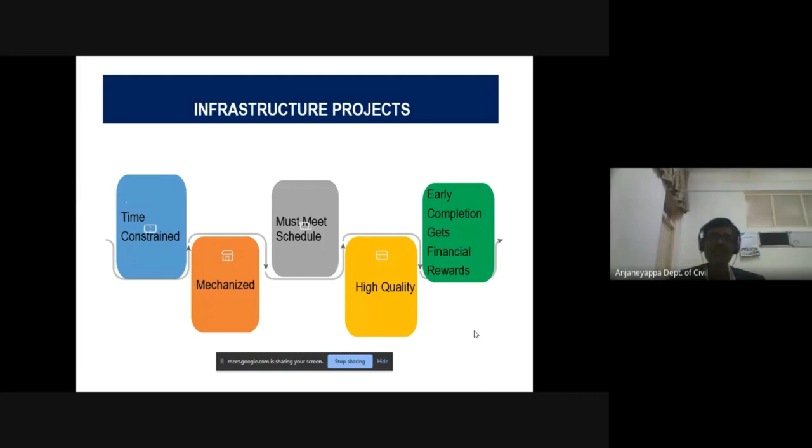Thank you. We cannot think of this high quality without these plants and machineries.

There are some advantages when we talk about these machineries for road projects. Majority of these machineries are versatile, they can be used for different types of activities. For example, the grader can be used for grading, mixing, and even cutting. The equipment delivers higher quality, not just higher quality products but also uniform quality. That's very important, and we can meet the schedule because production and construction will be faster, and because of this faster production we can save time. So, as I said, today's contracts offer financial rewards for early completion.

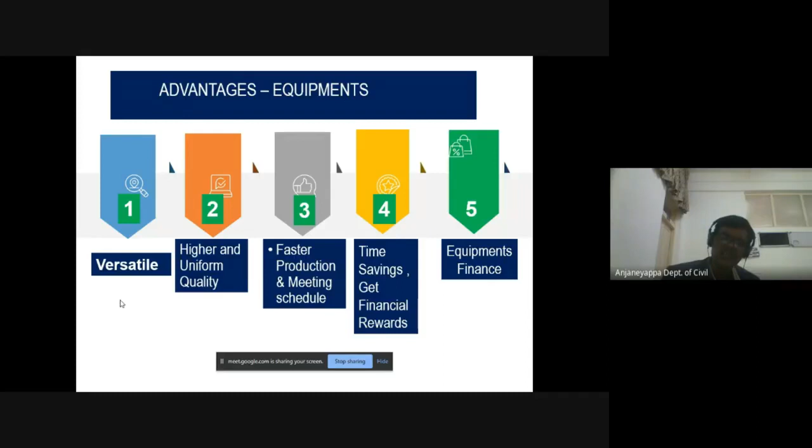When we look at the cost of equipment, as I said, they are very costly, there's no doubt about that. But again, for the owners, there are equipment financing institutions. Getting finance for these equipments is also easy. These are some of the advantages when talking about equipments.

Having said the advantages, there are some limitations also. As usual, these equipments are very costly. The cheapest equipment, our roller, is about 20 lakhs. Underutilization increases the cost of the project, and most of the time, though we induct very costly equipment, the plants for the road project are most of the time underutilized. So this underutilization increases the cost of the project, and operation and maintenance cost is also very high for machineries.

It's about 15%, a thumb rule. So a huge amount, 15% in 15 crores it runs, and in all highway projects, you may be aware that people talk only in 100 crores, 200 crores, 300 crores. Even the smallest project, the PMGSY project, is generally about 4 to 5 crores. So the operation and maintenance cost also will be high.

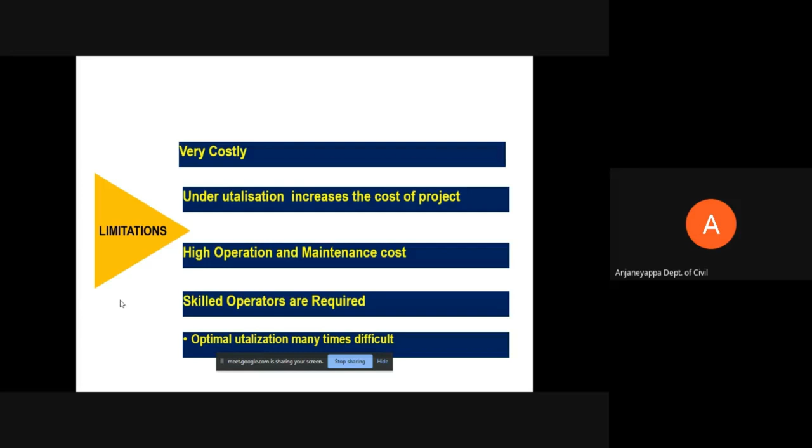More than anything, handling the operation of these plants and machineries requires skilled operators. And to be precise, there's an acute shortage of these skilled operators in the industry, for various reasons. So, some of the limitations.

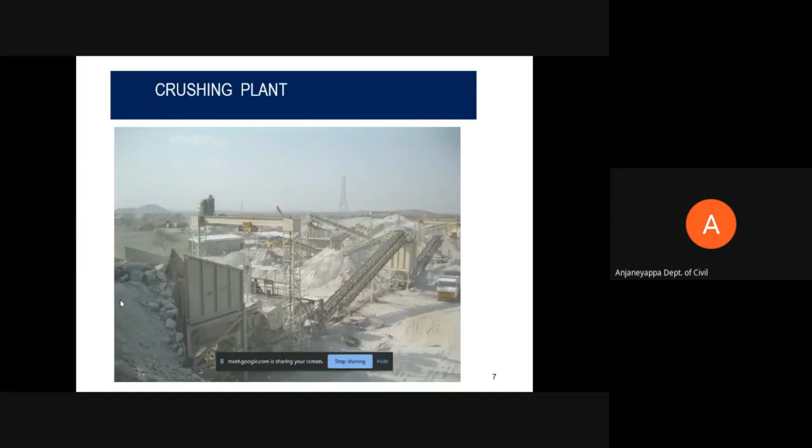Now, let's go to the plants, some of the important plants. This is a view of a crushing plant, an aggregate crushing plant. Go to any road project site, you'll find a crusher, and this is the crushing process from the quarry.

The rock is blasted and then drilled, made into bigger boulders, and these boulders are transported to the crushing plants through tippers. They are fed into primary crushers, and from the primary crusher it gets into the secondary crusher. From the secondary crusher the output will be of construction size, and many times this output is again subjected to the tertiary crusher, maybe to control the shape and to increase the fines. So that's how the crushing plant works.

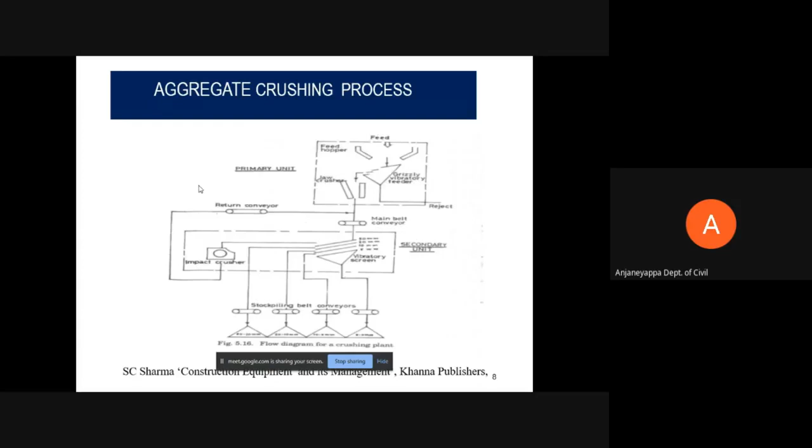So the boulders from the quarry are subjected to two or three stages of crushing, and if you want to classify the crushers, they can be classified based on mobility or based on function. When we classify aggregate crushers based on mobility, they can be classified as mobile crushers or stationary crushers.

What is the advantage of these mobile crushers? The crushing can be done at various locations. Many times it so happens for projects that we may not get the source of rock in one location because a huge quantity is required. So when there is a mobile crusher, this can be moved. Mobility will be easy, it can be moved from one source to another, so that crushing can be continuous and shifting is easy. That's the biggest advantage of these mobile crushers.

But again, there is a limitation. The output of these crushers generally will be less compared to stationary crushers.

So based on function, crushers can be classified as primary crushers. Generally, jaw crushers are used for primary crushing. In primary crushing, the input size is the boulders, generally varying from 600 to 1000 or around 1200 mm. The output size is our soling size, about 90 to 100 mm. So we feed the boulders into the primary crusher, and the output we get is of soling size.

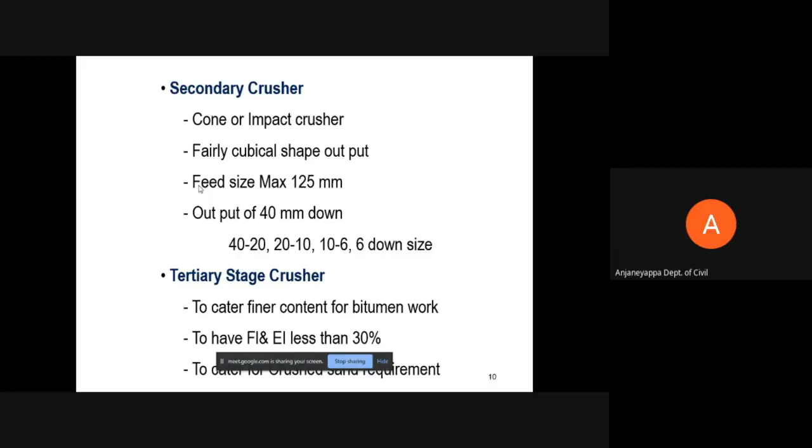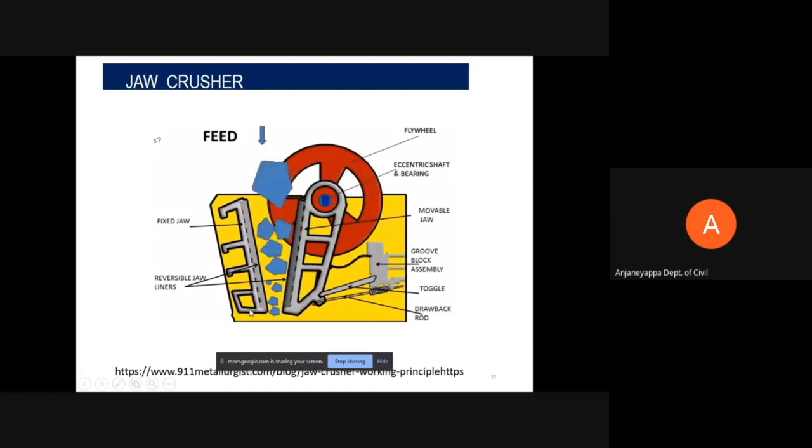This is another view of the jaw crusher. In the jaw crushers, as you have seen in the picture, one is the fixed jaw, the other one is the movable jaw or the swing jaw. These jaws are made up of heavy duty cast steel or manganese chrome steel so that they can sustain the high vibration, wear and tear during compression.

More production is obtained when the feed is of mixed size. Whatever the feed input size, this applies not just here but for other stage crushers also. Whenever the mixed size of aggregates are in the feed, we get more output; uniform size always gives lesser output. Another important requirement for good production is that the feed itself should be uniform in supply. Most of the time this does not happen - sometimes there is more feed, sometimes no feed, sometimes underfeed. So giving uniform feed to the crusher always results in more production.

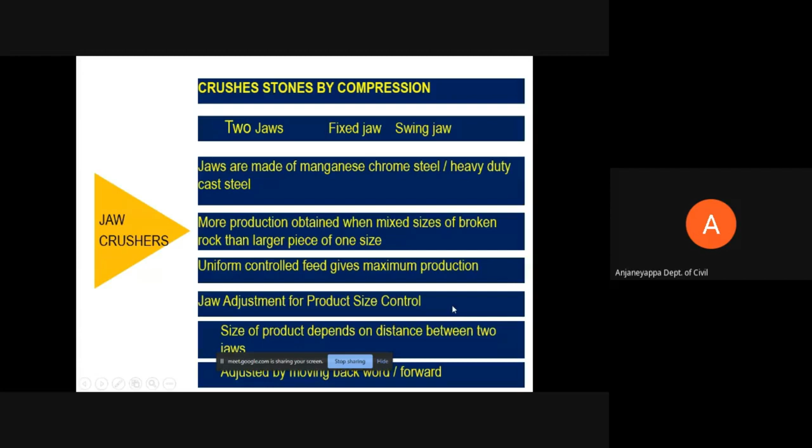We need to adjust the jaws to control the size of output. We can have three combinations of the fixed jaw and the swing jaw. One is the straight jaw, where both the fixed jaw and the swing jaw are straight.

What is the advantage of this combination? The wear and tear will be uniform, and the disadvantage is that the rocks, the output, hangs up here. Because of that, the output may reduce many times. Another disadvantage of having both straight jaws, straight faces, is that it produces more elongated or flaky particles.

The other combination for the jaws in the jaw crusher is one straight, other one kept curved. Since uniform feeding is not always possible, in such cases this combination is advantageous, and the crushing area is increased here, so output will increase.

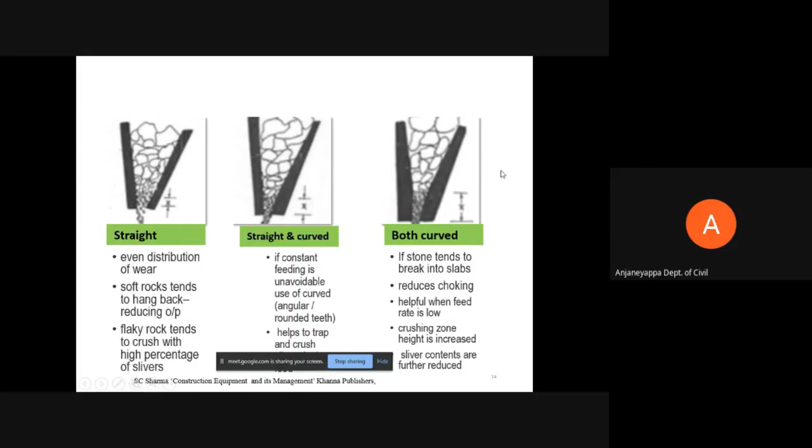The other combination is both jaws kept curved, both fixed and swing jaw. The advantage is it reduces choking, and this combination is helpful when feeding is very less or not uniform. The crushing height is increased here compared to the straight jaws, the crushing area is increased, and the flaky and elongated particles are further reduced if this kind of combination is adopted in the jaw crusher.

This cone crusher can be used to generate construction size output, meaning we get whatever size is required for construction. The gyratory head generates the gyratory motion, and the swinging motion is produced by the eccentric sleeve.

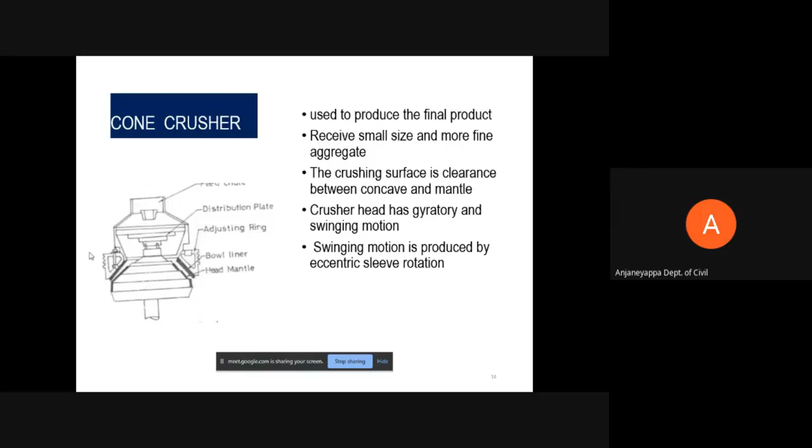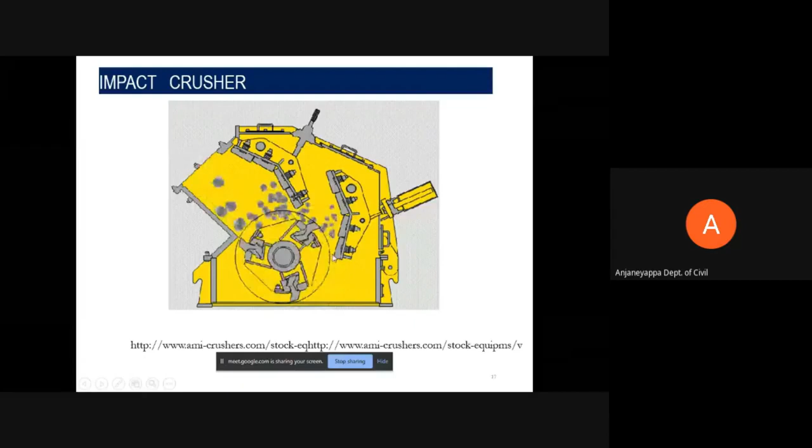The other type of crusher is the impact crusher. This is also used as a secondary or tertiary crusher. This is where the input from the secondary or primary crusher gets in - you can see the hammers - and the gap between the hammers and the rotor dictates the output size.

For the aggregates, both the jaw crusher and the cone crusher use compression to break the aggregates. In the impact crusher, it is the impact which breaks the aggregates. This impact crusher can also be used as a primary crusher, and impact crushers are used when materials are too hard and when a good shape of aggregates is required.

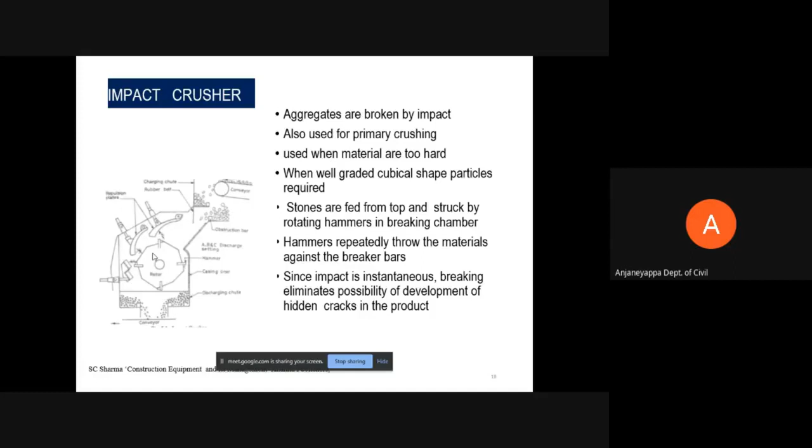The input is fed from the top, and the material is struck by these rotating hammers in these chambers. The hammers repeatedly throw the materials, generating an impact that is instantaneous. This instantaneous breaking eliminates the possibility of hidden cracks in the output, which is desired.

The impact crushers have a high reduction ratio, meaning the reduction ratio is very high, and the biggest advantage is we get a very desired shape and also very high output from the impact crusher. If you look at the reduction ratio of a jaw crusher, it is 4:1 to 9:1 - this reduction ratio is the ratio of feed size to the output size.

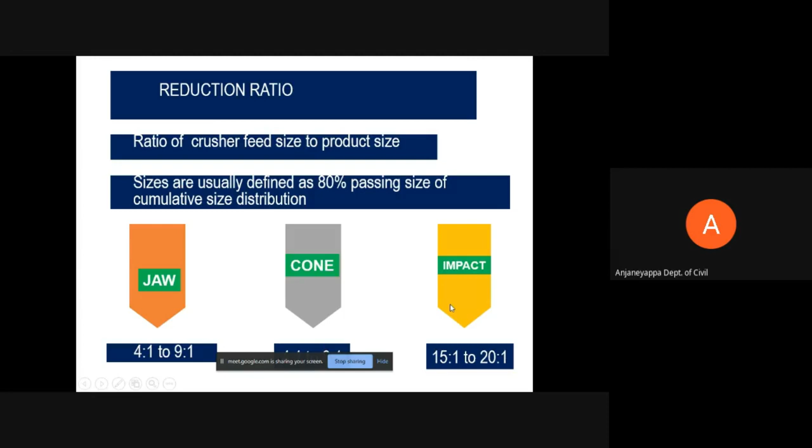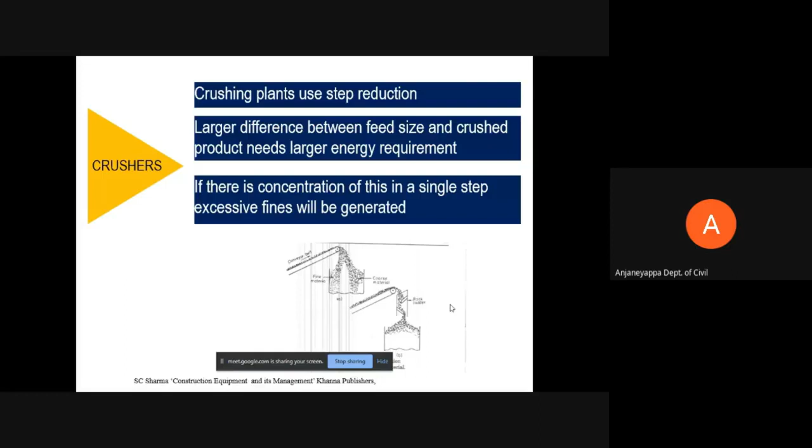Here the reduction ratio is 4:1 to 6:1, and here it is 15 is to 1 to 20 is to 1. So high reduction ratio is expected, and it is very important in crushing to adopt step reduction. A large difference between the input size and output size requires huge energy, and if that difference is very high, excessive fines and excessive sand are also generated. Hence it is always desired to adopt stage crushing.

So the output of the crusher depends on the jaw opening. Lesser the opening size, lesser will be the output. What is the end product size required? Bigger size means more output; lower size requirement means lower output. And the kind of rocks, whether the input is of softer or harder quality, also dictates what the output is.

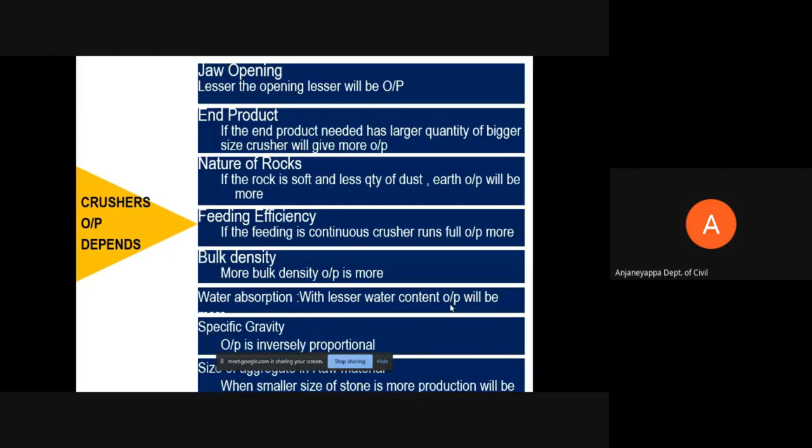Then feeding efficiency matters, whether feeding is continuous or low. More and uniform feeding always gives more output, and it also depends on density - more the density, more the output. Water absorption, if there is lesser water content, output will be more, and specific gravity is inversely proportional. Smaller size feed always generates more output.

So that's about the crushing plant. Then comes the pug mill or wet mix plant, used for production of wet mix, which is widely used as granular base in our country. This is the wet mix plant at the pug mill.

You can see these are the hopper bins, cold aggregate feeder bins, and there's a conveyor belt, and there's a pug mill or mixing unit, and of course there is a control panel. This is the stockpile of different sizes of aggregates here.

The loader or backhoe loads these hopper bins, and we have the openings here controlled, and that opening can be varied by operating the lever here. The flow of materials is also controlled by the speed of the conveyor belt. Depending upon our job mix formula and by trial and error, the opening size is fixed for different sizes of aggregates, and the speed is also fixed.

From these hopper bins, the mixed aggregates move and get into the pug mill. Here, the known quantity to achieve OMC is pumped - water is pumped - and the aggregates and water are mixed thoroughly, then unloaded onto the tipper, and the tipper goes to the job site.

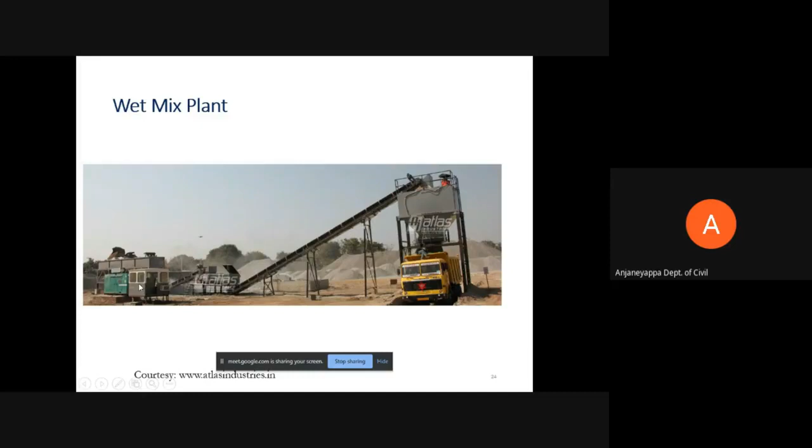So this is another view of the wet mix plant, and all the operations are controlled by the control unit here. This is another view.

Then comes our hot mix plants, used for production of bituminous mixes. There are different types of hot mix plants: mini plants, portable plants, stationary plants. This is one way of classifying the hot mix plants or bituminous plants. The other classification is drum mix plants and batch mix plants.

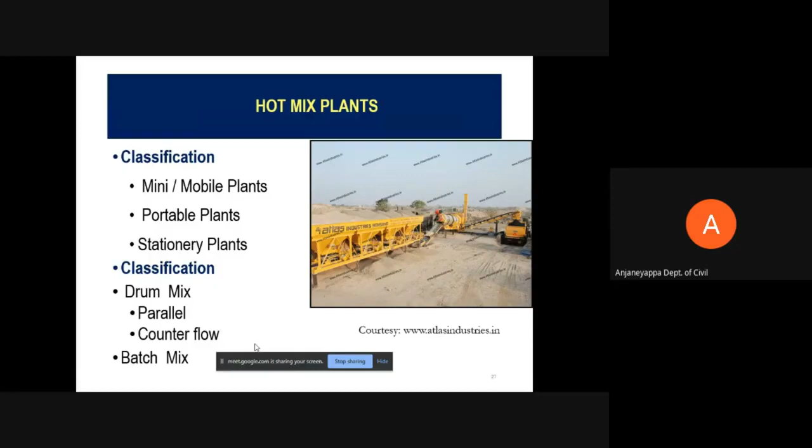Let's look at these mini plants. The name itself indicates they are used for small road projects, and most of the time even these mini plants are used for maintenance activities, and they can be moved easily on pneumatic wheels. They can be easily installed and transported in a tipper or big trailer - that is the big advantage. The main disadvantage is that they are not suitable for major projects, as the output is less from these plants.

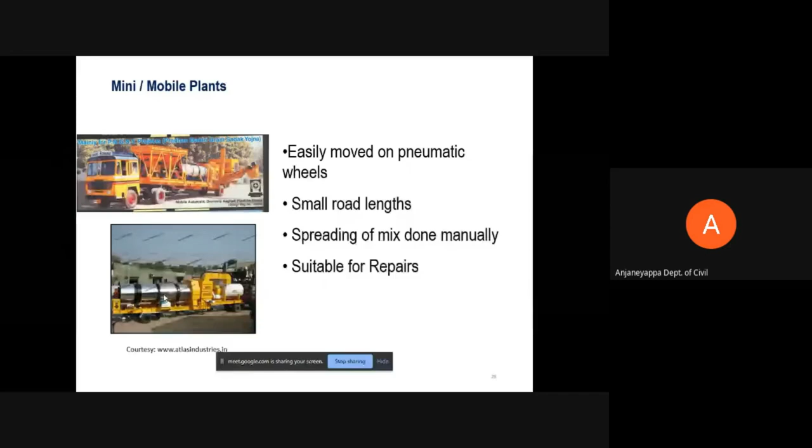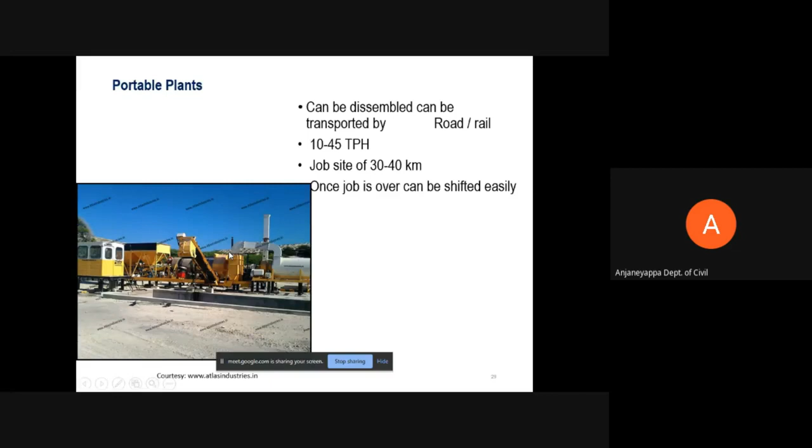Then comes the portable plants. Again, these portable plants can also be transported easily on road or by rail. The capacity varies, starting from 10 to 45 tons per hour, and this can be used for a project or job site of 30 to 40 kilometers. The biggest advantage of these portable plants is that they can be shifted easily from one project site to another.

Then comes the other type of hot mix plant, the stationary plant. These stationary plants are installed on a permanent site. As I said, these stationary plants will have the capacity of generating anywhere from 60 TPH tons per hour to 200 tons per hour, or even more, 300 also. These are used for major road projects and suitable for a job site of 50 to 60 kilometers or even more.

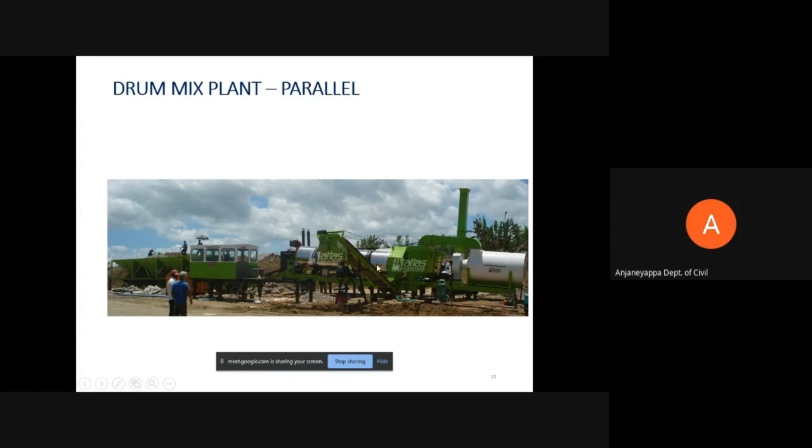From the hopper bins, the aggregates get into this drum. Here the aggregates are heated to the required temperature, and from here the materials get into this drum. The bitumen is pumped, and aggregates and bitumen are heated, and then it goes to the loading unit. So here, in the parallel mix plant, the aggregates...

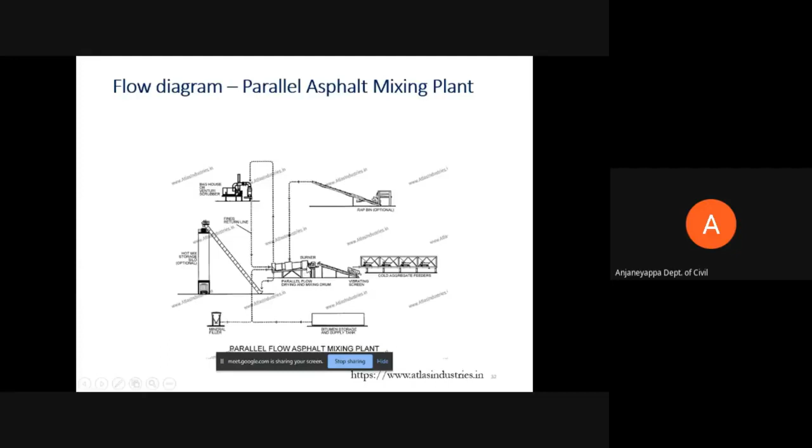Aggregates are also fed here. The heating burner is also kept here. So that means the heating and the aggregate flow is in the same direction. Hence, they're called parallel drum mix plants.

The other type is the counterflow drum mix plants. That means aggregates are fed from one side, and the burner will be on the other side. This is a counterflow drum mix plant.

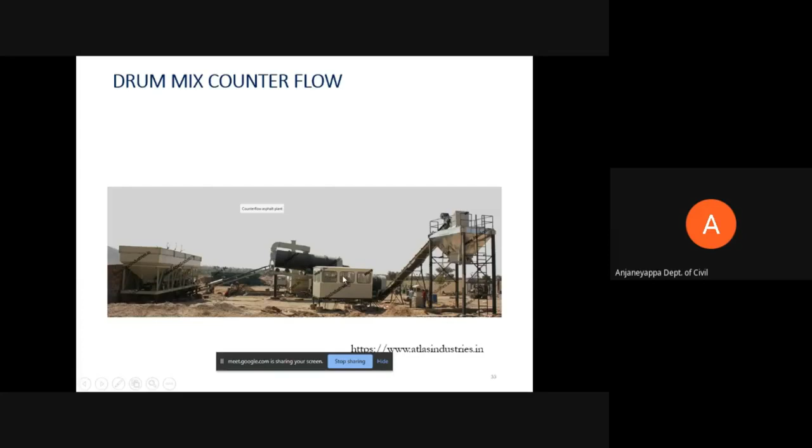From the hopper bins, the aggregates are fed into these drying units where aggregates are heated to the required temperature. In this specific case, after heating, the aggregates are elevated through the bucket elevator to the screening/sieving unit. The hot aggregates are sieved first and then they are weighed.

After weighing, it is fed into the pug mill or the mixing unit, and here the preheated bitumen is fed, and both are mixed, and the mix is unloaded onto the tipper or to the storage silo.

So the aggregates from the hopper bins are fed into the dryer drum, then they are taken to the screenings, and then they are weighed, and then it is mixed.

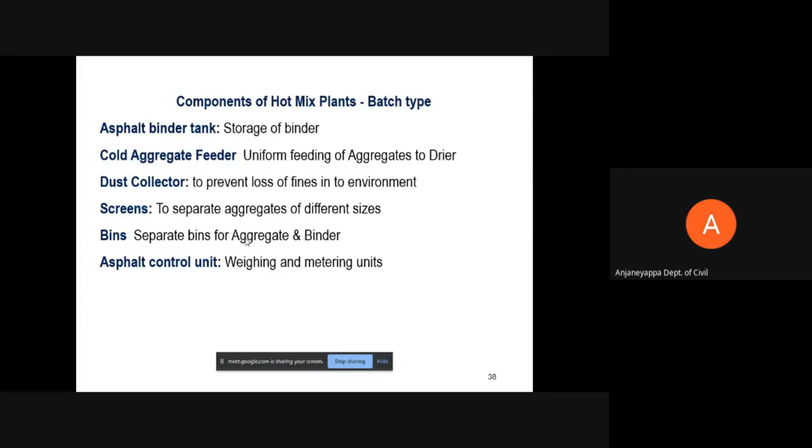And then to the mixing unit, the preheated bitumen is pumped. So we have this bitumen storage tank, cold aggregate feeder bins, dust collector, screening, aggregate bins, and control unit.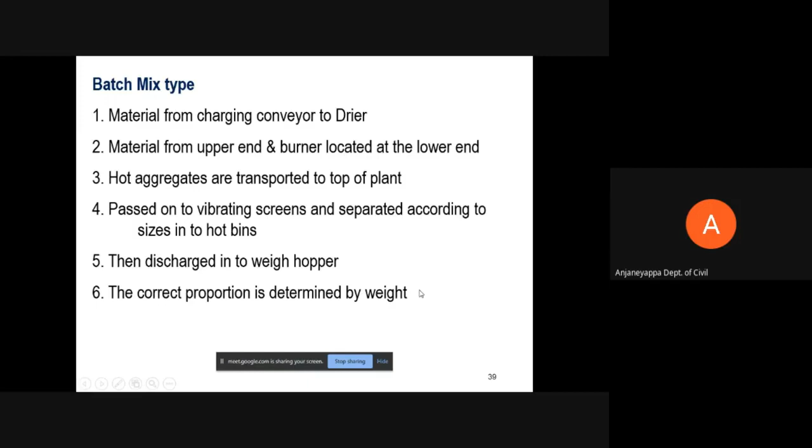So all these mixing operations, starting from the dryer, the hopper bins, aggregate hopper bins, cold feeder bins, to the output, all the operations happen in about 30 seconds.

This is the typical view of cold feeder bins for a hot mix plant. The separate feeding, the partition between each feeder bin, is very important. Most of the time we don't find this. So when a loader is loading the material or a tipper is unloading the material, this size material gets into the other bin, and that size material gets into the other material.

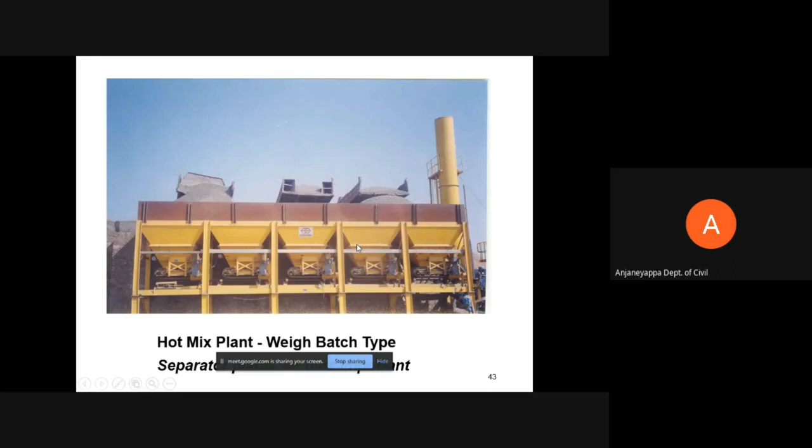And at the end of the day, when we talk about the bituminous layer construction, gradation is a very important quality parameter, and we don't get the required gradation. So at every stage we need to control the segregation to have better control over the gradation, and loading is very important when loading cold feeder bins, otherwise whatever job mix formula we thought of will go in vain.

Another view. So that's about the hot mix plants. Now let's discuss about the pavers.

If you take any paver, generally it has got two sections. One is the tractor, the other one is the screed, and these two components are connected by a tow arm.

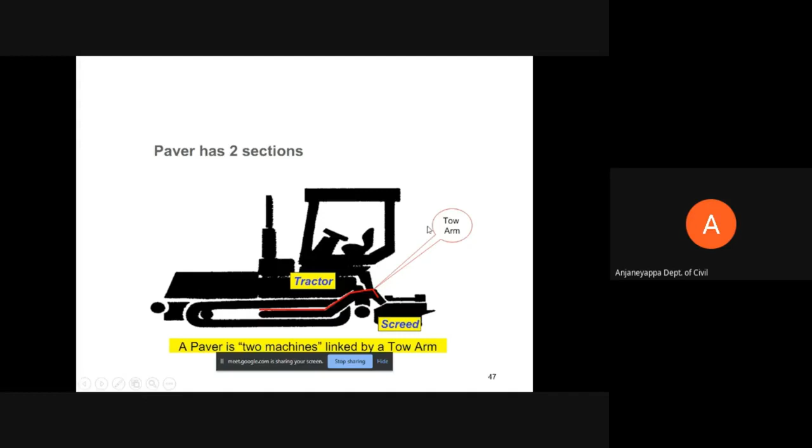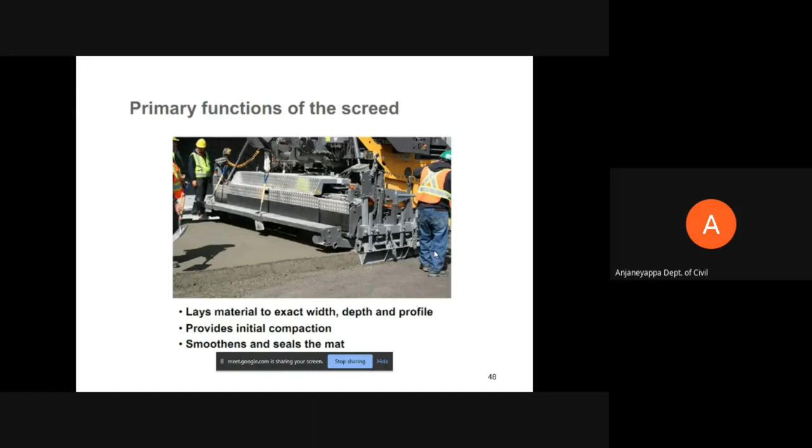What is the function of this paver? To lay the mix, the asphalt mix, to the required width, required depth, and required cross profile, as well as the longitudinal profile. So the paver does the initial compaction. Majority of the compaction is done by the paver and then by the roller. So the paver gives us a smooth surface, and it also seals, giving a sealed surface. That's the basic function of the paver.

There are different types of pavers.

One is the track mounted paver, the other is wheel mounted paver. There are advantages and limitations of these two categories. If there is a wheel paver, mobility is easy and performance is also easy. But the only limitation is it cannot be operated on relatively soft bases, and maintenance is also low compared to a crawler mounted or track mounted paver.

So the advantage of a track driven paver is we can pave higher lift thickness, larger widths, and relatively it can be operated on soft bases. Let's remember, paving is not done on soft bases - I am using the term relative. So it can be effectively used on gradient surfaces, whether up gradient or down gradient, compared to the wheel driven paver.

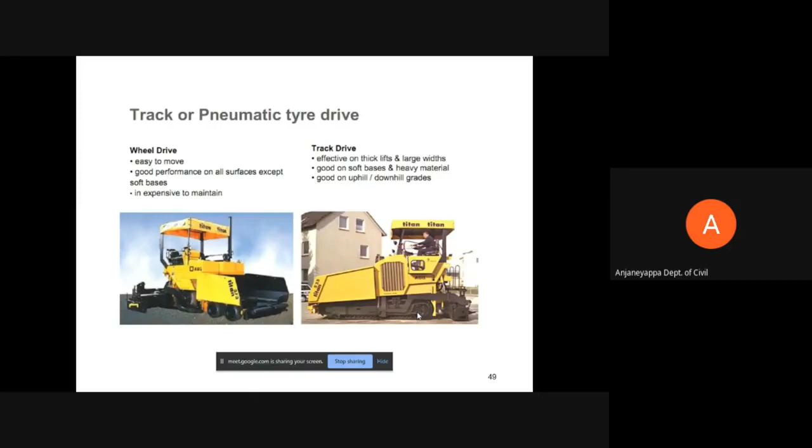There are two types of screeds attached to the paver, the fixed and variomatic screed. So fixed or manual screed, and this is the variable screed. The width of paving can be adjusted based on the width required.

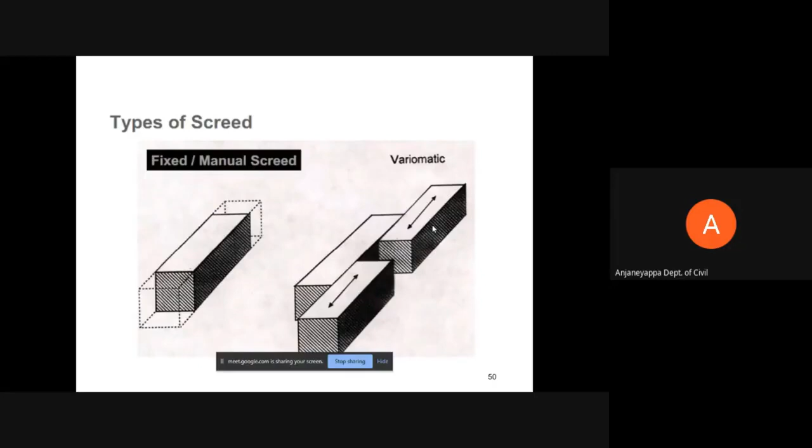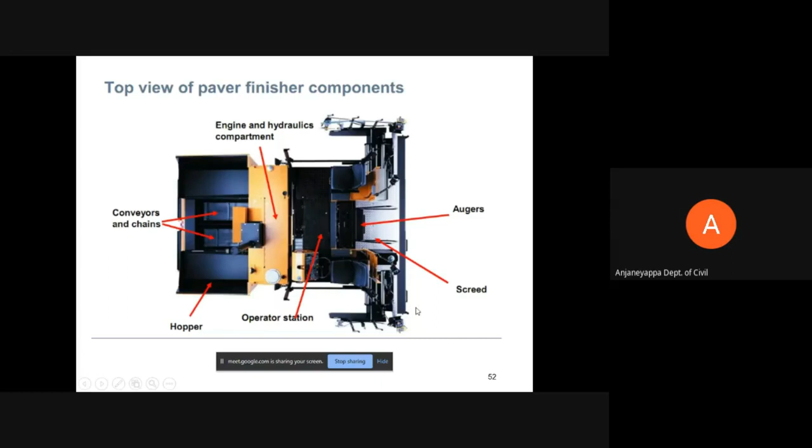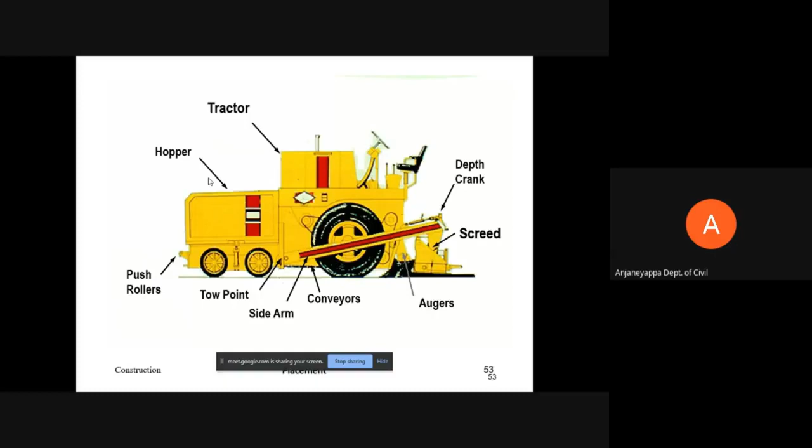What is more important when talking about paving is maintaining a uniform constant head in front of the paver. Whatever be the type of paver, maintaining a constant head in front of the paver is very essential, otherwise we may not get a uniform surface. If the head of material in front of the auger is more, then automatically the paving thickness increases, which may result in non-uniform thickness and non-uniform profile. When the head of material is less in front of the auger, then also the paving thickness reduces, resulting in non-uniform profile.

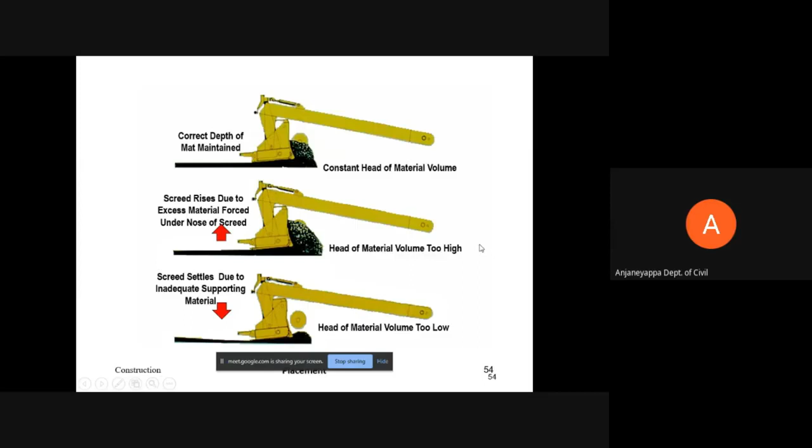So maintaining a constant head in the paver is very important, and paving is an art - more than engineering, paving is an art, and paving is a continuous process. Any paving should not be stopped unless there is a genuine reason. Once we start the paving, we should not stop unless warranted. Then only we get a uniform surface.

Whenever we stop the paver, that creates a weak plane, and the first failures generally occur wherever we stop, because wherever we stop and start the paver, we get a temperature segregated surface, or aggregate segregation will be there. Totally we get a weak plane. So as far as possible, any paving should always be continuous, but most of the time this does not happen. So segregation is very, very important.

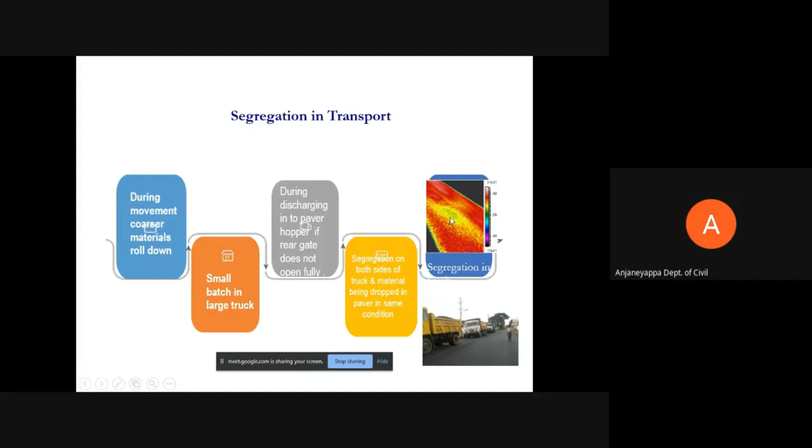Even during discharging the mix from the tipper to the paver, if the tipper gate is not opened properly or fully, then also segregation happens. So segregation is one part. The temperature segregation is another issue that we need to be very careful about.

The hopper should never be emptied; material should always be maintained in the hopper bin of the paver. This picture shows an empty tipper - still work is on, and the paver hopper is empty. This results in a segregated surface, non-uniform profile, etc.

Maintaining this is the reason paving should always be continuous. To have this continuous process, there should be synchronization of all activities, starting from the HMP, the number of tippers required, the distance, and then paving. All this should be coordinated so that once we start the paver, it does not stop. The paver speed should be adjusted based on the distance from the hot mix plant to the job site and the capacity of the hot mix plant.

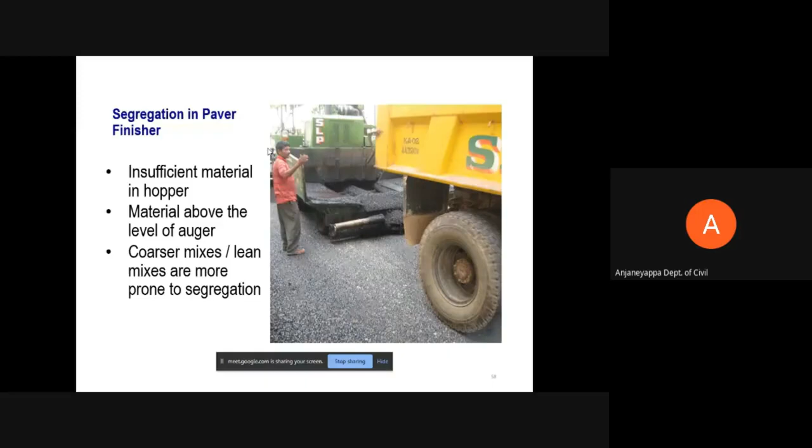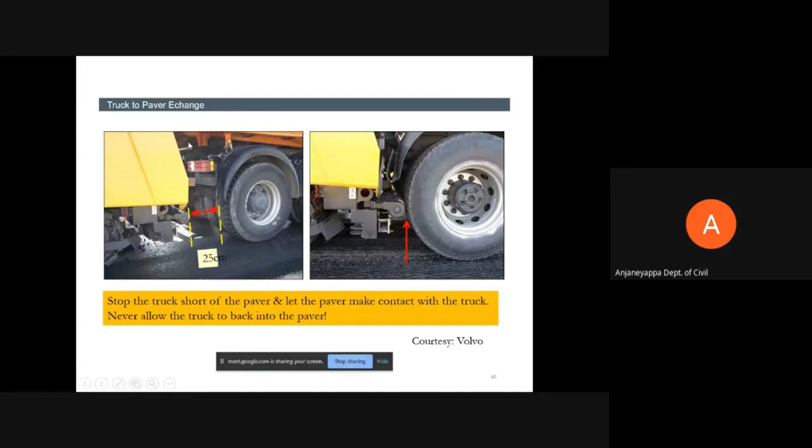Whenever loading material onto the paver, the tipper should move slowly near to the paver, and the paver will come and join the tipper. So the tipper should be at a place, and the paver slowly comes and joins it, then the material should be unloaded. Otherwise there'll be impact, and that results in a non-uniform surface.

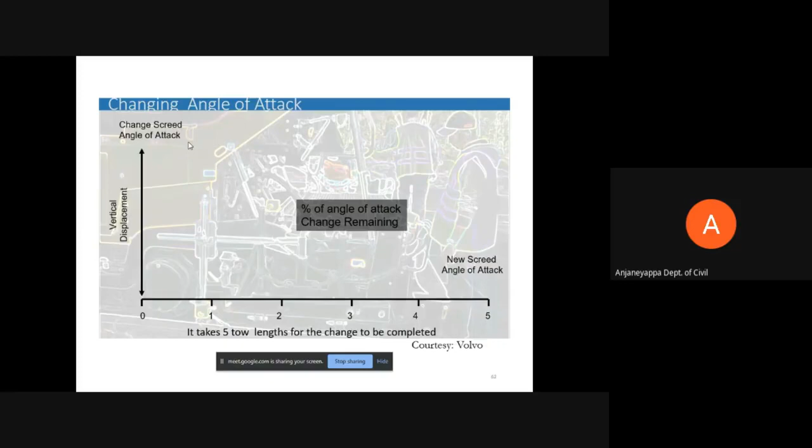Whenever we want to increase or decrease the thickness, that change does not happen instantly - it takes some time, some distance. Generally about 17 to 20 meters is required to change the thickness in the case of a manual paver. In case of a sensor paver, about 10 meters length is required to change the thickness. So instantly operating the lever or gear to change thickness will not happen.

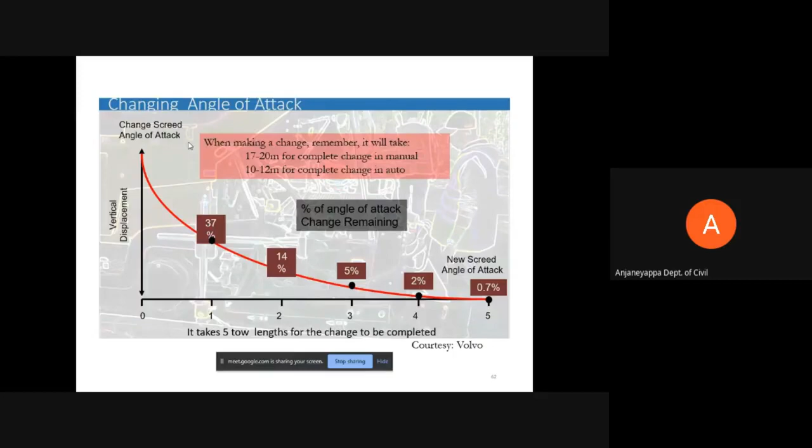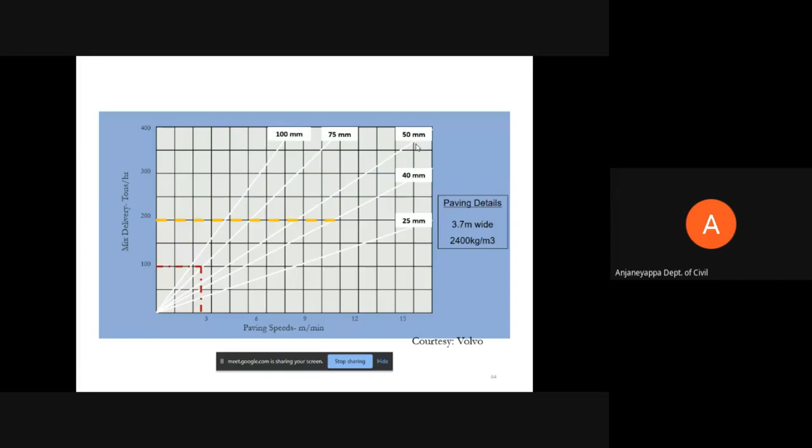Depending upon the paver speed, the plant capacity, and the thickness, we should decide the paver speed - the thumb rule. Let's say my plant capacity is 100 tons, my paving thickness is 40 mm, and my speed should be 3 meters per minute per lane, assuming my material density is around 2400 kg per meter cube. This is the thumb rule - paving speed is adjusted based on the thickness and the capacity of my plant.

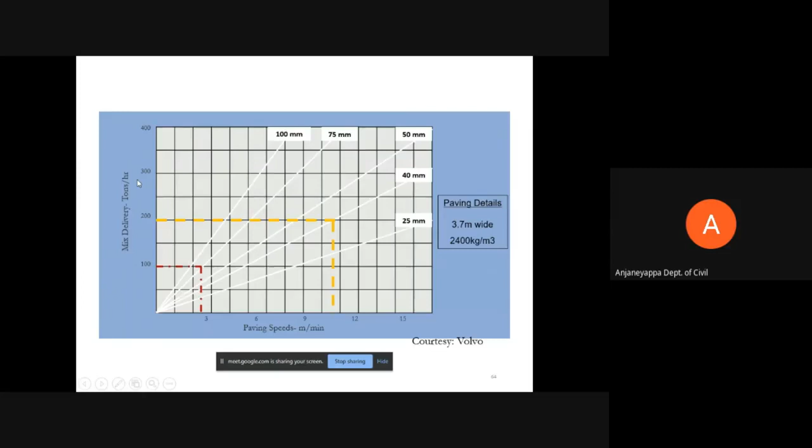Thermal segregation can happen at many places, and since bituminous mix is thermoplastic and highly dependent on temperature, controlling the temperature is very, very important. Poor temperature control results in a poor quality surface.

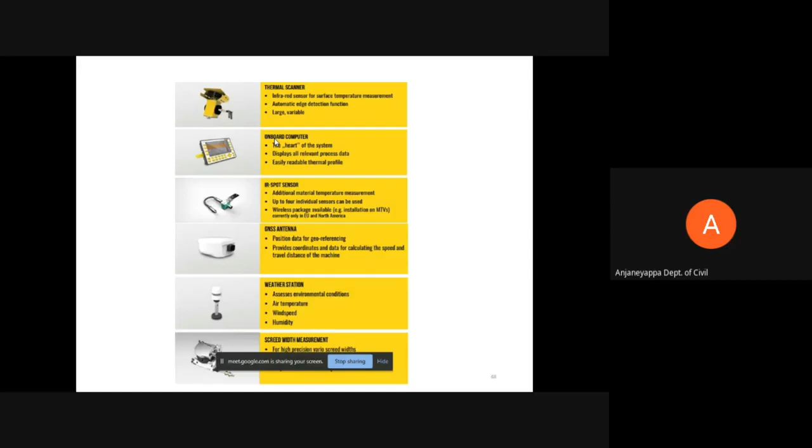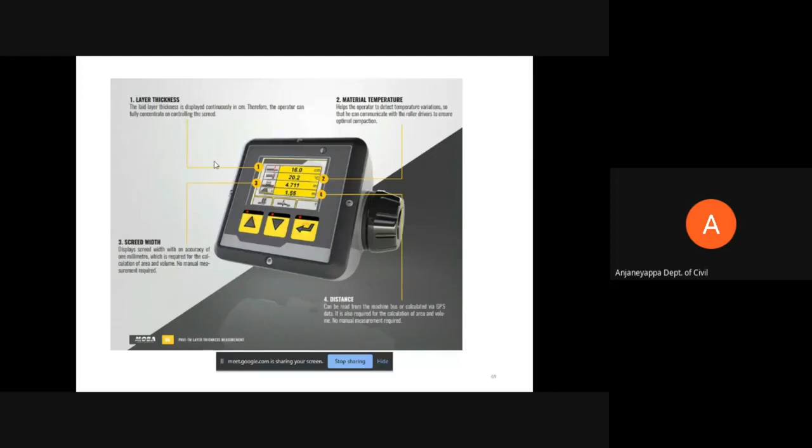By controlling the temperature we can have different adjustments - extra attachments to the paver such as antennas and thermal scanners, so that the operator can see on the paver board what is the temperature, the weather, and the width, etc. All these can be readily seen, including at the centralized plant. This helps in controlling quality as well as in managing the project.

Then comes our rollers, the compactors. There are four types of forces imparted by rollers: static, kneading, impact, and vibratory or oscillation forces. The static and kneading forces are lower forces, while impact and vibratory/oscillatory forces generate higher forces, so the density also will be more.

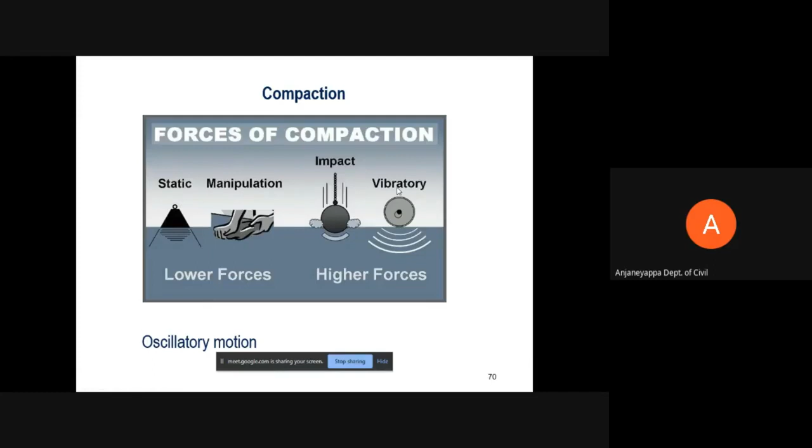The intention of compaction is to increase the stability of the bituminous mix, increase resistance of the mix towards permanent deformation, reduce moisture penetration, increase fatigue resistance, and reduce low temperature cracking potential.

There are different types of compactors: static compactors, kneading compactors, vibratory or oscillatory compactors, and light compactors. Static compactor generally means the soil compactor. All the compactors we see today can be operated both in static mode as well as in vibratory mode.

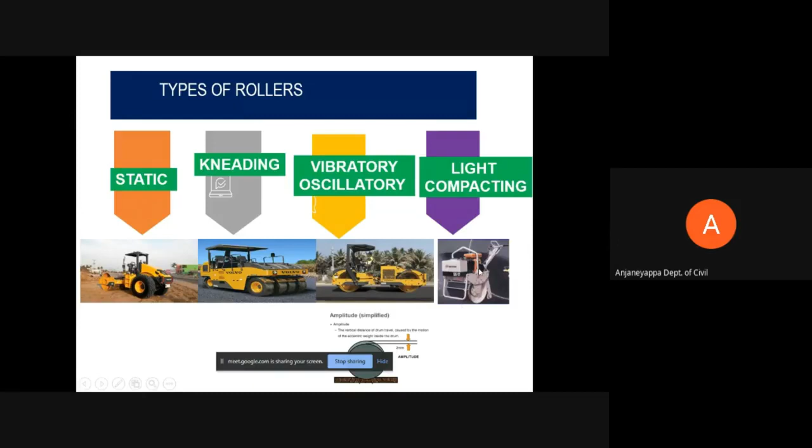These compactors, if you switch on the vibratory mode, can be used as vibratory rollers. If that mode is switched off, they act as static rollers. Kneading compaction is generally done by pneumatic rollers, which fall under this kneading class. The force is generated by kneading action, while vibratory or oscillatory motions generate high forces. For constrained areas, we go for handheld equipment.

So when we talk about soil compactors, how do we classify them? When there is only one single drum, we call it a soil compactor. If there are two steel drums, we call it an asphalt compactor or double drum compactor.

For a static roller, the compaction efficiency or output depends on the gross weight of the roller, the speed, the material type, and the thickness of the material. All these govern the compaction output or density level.

For a kneading compactor, it is articulated and cannot be operated in vibratory mode. Whatever gaps are seen in the front row on the rear side are filled by rear side tires, making it a continuous operation. This compaction is by kneading, and since there's a big area inside, we can ballast it using any material to increase the weight of the roller depending on the density requirement.

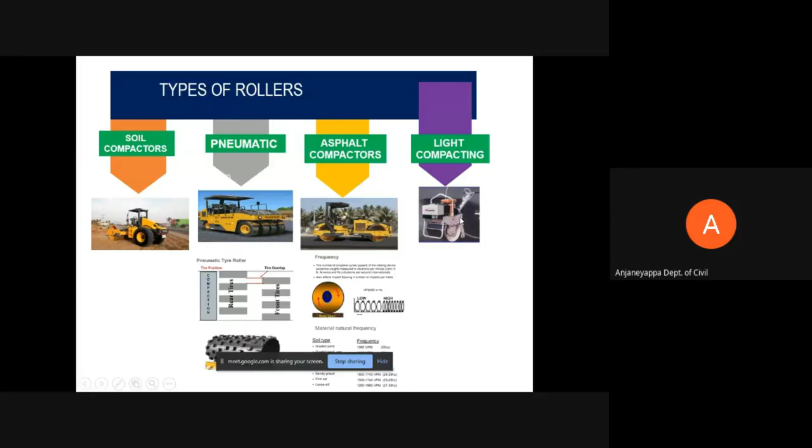So for static rollers, it is gross weight, speed, and thickness; for pneumatic rollers, it is the pressure in the wheels; and for vibratory rollers, it is the weight of the roller, amplitude, frequency, and speed. This kind of light compacting equipment is more useful for such constrained applications.

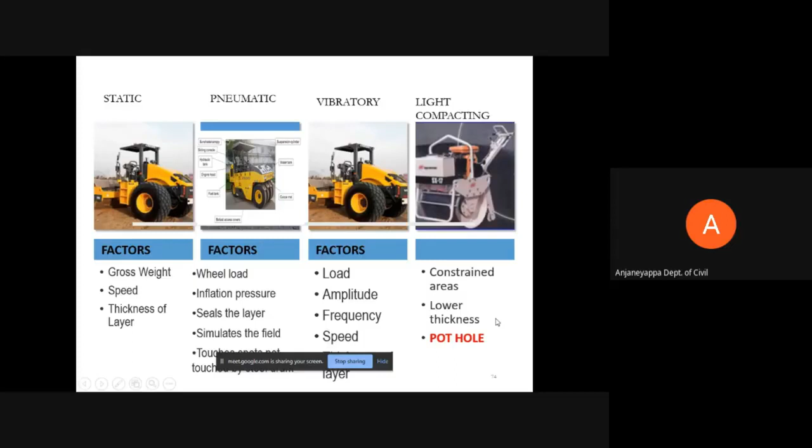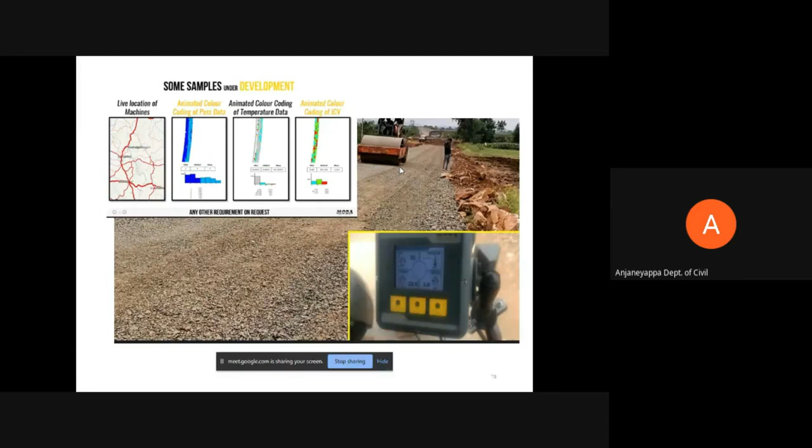There are customized attachments to show the density of the bottom layer in the roller itself. These are additional attachments that can be fitted on demand, which give the live location of the machines, the temperature, and the density achieved, so that we can optimally use these machines. We can stop once the density is achieved. All these can be used as additional attachments with minimal investment cost.

There are some precautions to be taken during rolling. Maintaining uniform speed is very important, and we should not allow the compactor to stand. Jerky starts, sudden braking, and sudden changes in maneuvering are not desirable, as these damage the surface.

This small amount of detergent to be used, or vegetable oil to be used other than water, and the performance chart of these equipments needs to be taken from the equipment manufacturers. Generally, neither they give nor we, the customers, ask. That's really a good thing we should start doing from now onwards.

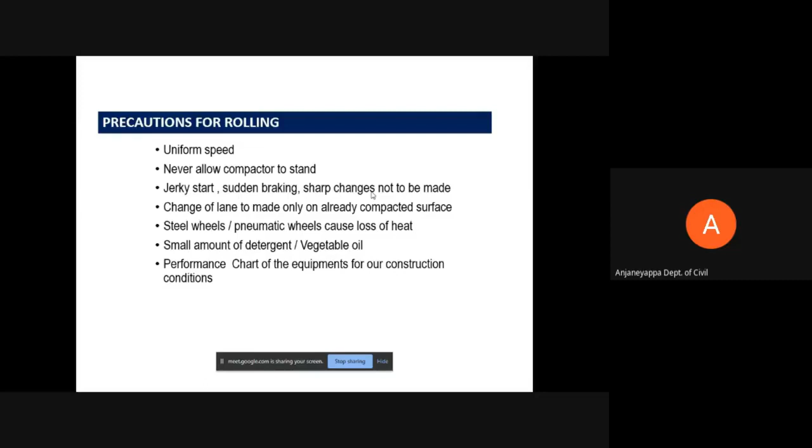So there are some big concerns when you're talking about these equipments. We have talked about all these equipments.

But when we're talking about these plants and machineries, there are some constraints. For example, my crusher is 200 tons per hour, pug mill is 100 to 200, my hot mix capacity is 200, and my paver capacity, compactor capacity, I've taken just on the lower side, 500.

So synchronizing the capacities of machines is very, very important. Otherwise, one machine will be overutilized, other equipment will be underutilized, so optimization will not be there. That is one biggest concern.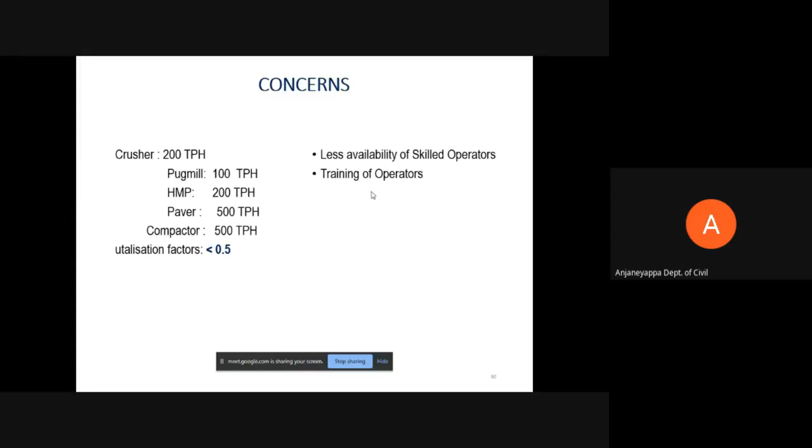And as I said, the skilled operators' availability is very, very less in the industry. And training this operator is another important requirement in the industry.

Another concern when we're talking about these plants and equipment is the diesel consumption, the fuel consumption, which is very, very high. The thumb rule calculation is about 10,000 liters per kilometer per lane for new construction. Otherwise, if you look at the consumption for these equipments, crusher to compressor, it varies from 5.5 liters to 60-70 liters per hour.

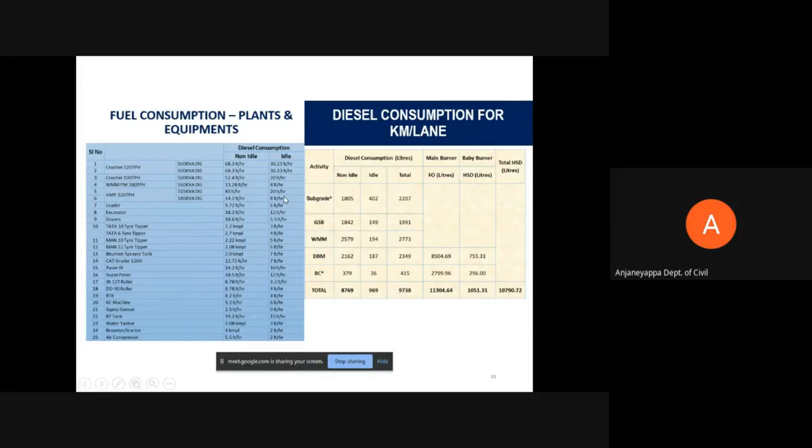Once we start, a huge quantity of diesel is required. That's what we need to understand.

So fair knowledge of these plants and equipments is most important for the project manager, the site engineer, or even the operators. Otherwise, optimization of the project resources will be difficult. This knowledge is very important to keep the financial condition of the project healthy, to increase the profit, or to complete the project as per schedule.

One small concern I missed is that trained operators are very, very important, because they are something like the cooks. We have all the costly machineries, but end of the day, the operator is very, very important. If we do not operate in the right way, that results in poor quality mix and poor quality product. That's very, very important when we talk about plants and machinery.

So I think my presentation is complete now. Any clarifications? I'm happy to share for any clarifications. Over to you.

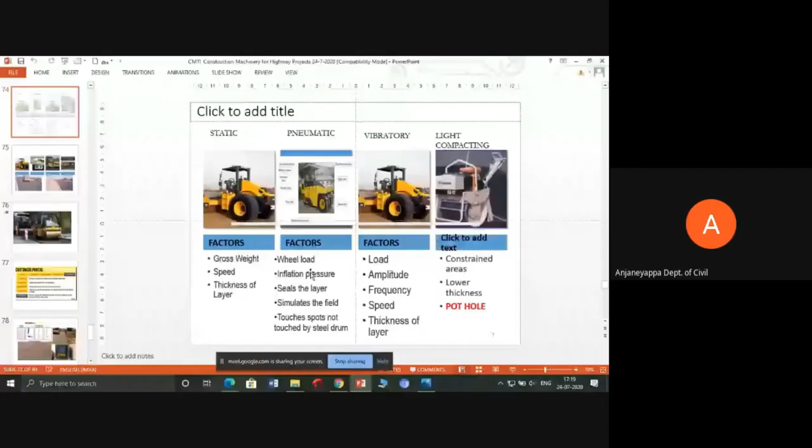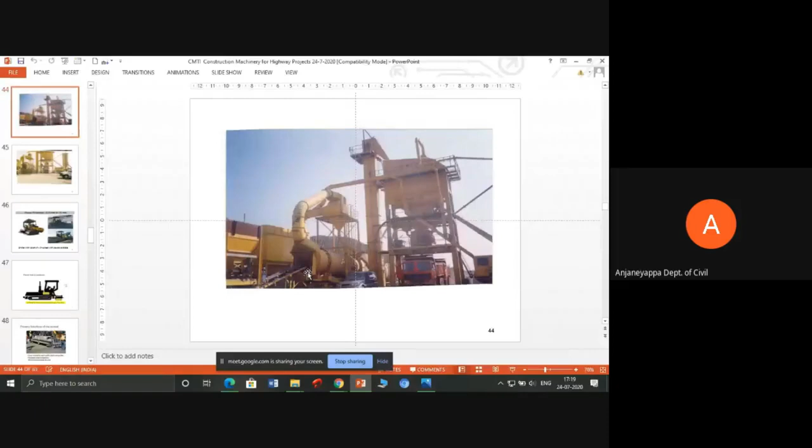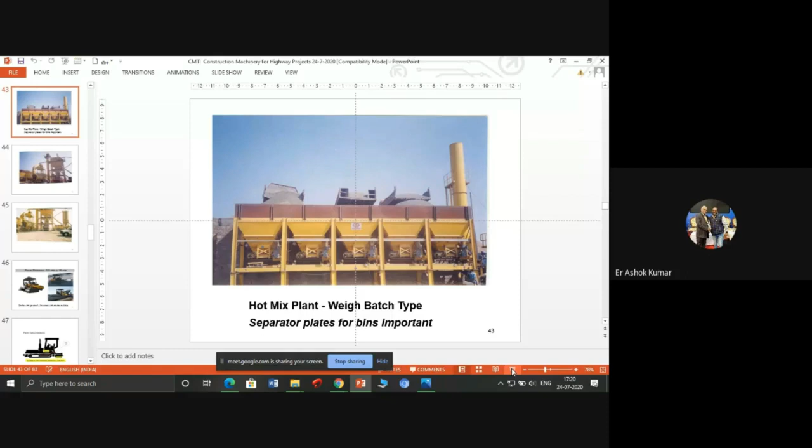Slide number 43, sir. One second. Is this visible to the audience? Yes, this one, sir. No, not this slide. I will check with him. Syed, is this the same as what you're asking, or the next slide? Syed Haider? No, you have to finish the presentation, then only you can see it, Anjan Kumar. One second, sir. Yes, please — can you explain the flow chart of slide number 43? I think this flow chart isn't in this one. Maybe this one? It may be the earlier one — this one? Yes, yes, he confirmed yes.

Okay, so what is shown here — before that, let me show the other chart and then come back to that. This is a typical batch mix plant, and the flow diagram shown is for this plant. Here you can see the hopper bins — generally there are 4 hopper bins. One hopper bin has 12 mm aggregates, another has 6 mm aggregates, quarry dust, and 10 mm aggregates — 4 bins with 4 different types of materials. Depending on our job mix formula and design, the openings below these hopper bins are adjusted, along with the speed of the conveyor belt. From these cold hopper bins, the mixed aggregates get into this unit called the dryer. What is the function of the dryer? These mixed aggregates are heated to the required temperature — only heated.

And then these heated aggregates are taken to a bucket elevator in this tower type of plant to what is called the screening unit. These aggregates are screened here. There will be sieves, different types of sieves as per our requirement, and these heated aggregates are sieved here.

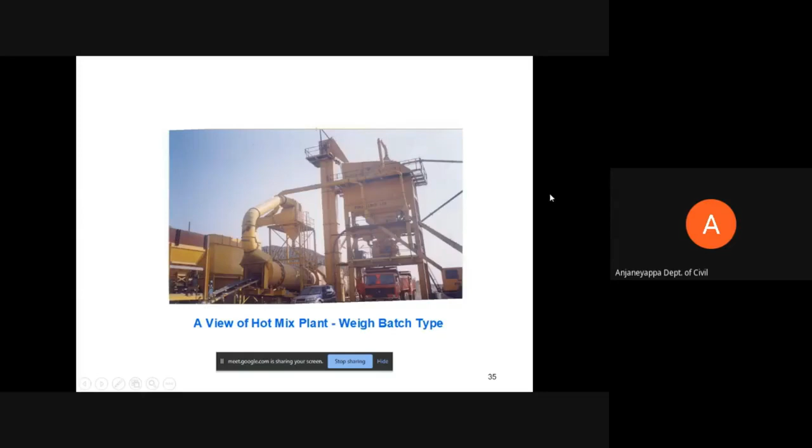What is pug mill? The mixing unit, where these materials and the preheated bitumen is pumped here, and these preheated aggregates and bitumen are mixed, and then it goes to the storage bin or to the tipper, and then taken to the job site. And the same is presented here in this flow chart.

So these are the hopper bins, cold aggregate bins. One will have 10, 12, and 6, and the quarry dust. And we will have openings here depending upon, say, 12 maybe 30% requirement, then 6 maybe only 10%. So based on the requirement, the openings are adjusted.

The conveyor belt speed is adjusted in the control room, and these aggregates from these hopper bins are taken. And this is a vibratory screen. By any chance, if there is any oversized aggregate material, it is taken away here. So this is a conveyor belt, and this mixed material gets into this drying unit, what's called the drying unit.

So here in this particular figure, it is a counterflow, that means aggregates are fed from this side and the burner is on this side. So these aggregates are heated to the required, very high temperature, and the fine particles get collected in this bag house or wet dust collector, so that it does not directly get into the atmosphere, not polluting.

So after heating, these heated aggregates are taken to the top level through the bucket conveyor, and there we get what is called vibratory screens. They are literally sieved, and then after sieving, different sizes of aggregates are separately weighed. They get into different bins, that is not clearly shown here, and they are weighed.

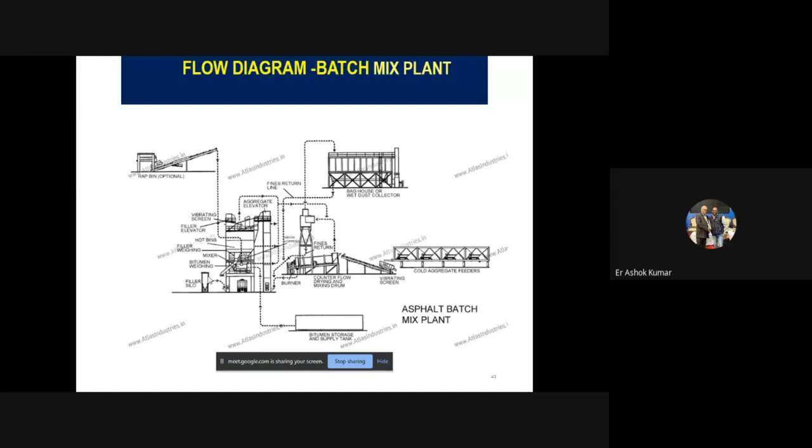It's only a thumb rule, based on the equipment's wear and tear and the surfaces. Many factors matter, including the location and temperature conditions. According to the location, the volume of the project is decided. If the width of the paving is more, the cost will be less. If the width is very less and you need to shift the paver many more times, the cost will go up. It depends upon the project volume and the site conditions.

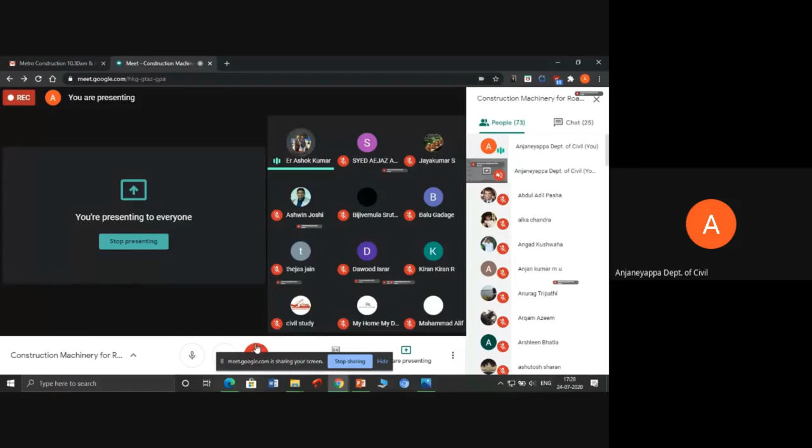Ashutosh Sharan from Alliance University asks: sir, is the paving and compaction process the same in case of flyovers and in the curves? Is mastic asphalt used there, sir?

No, but for any paving, the general principle remains the same: it should be continuous. Paving should always be continuous, whether it is curb paving, concrete paving, or asphalt mix paving.

One more question: in flyovers and structures, is the compaction the same procedure or a different one? Compaction remains the same for asphalt layers, depending upon the thickness. If it's a very thin layer, no compaction or only very static compaction is sufficient; vibratory compaction or mild vibrations may be required otherwise. But the compaction operating procedure remains the same, whether on flyovers or at-grade roads.

A few more questions are there, sir. Will you take them? Yeah, please.

How is batching done in a hot mix plant, manually or mechanically? It is mechanical, Mr. Siddharaju. Sir has just explained this in the slide. It is done mechanically, using weigh batching. Everything is controlled in the master control room, and it is highly mechanized.

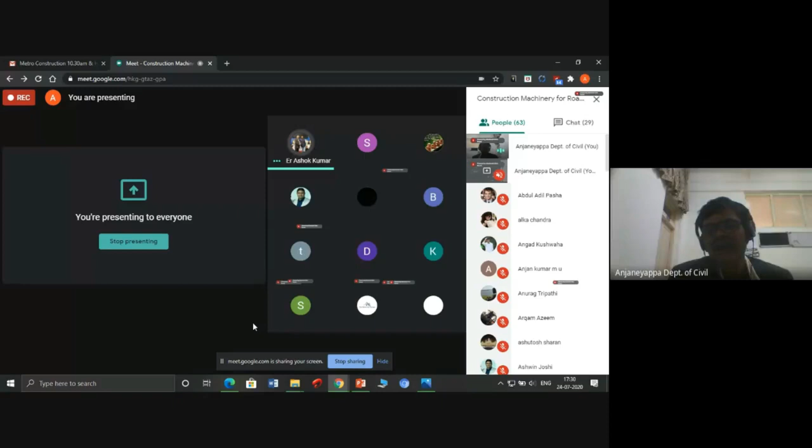We are asking for your email ID so that people can write in if any questions come up. Please, you can share it. I can share it: Anjaneyappa at rvce.edu.in.

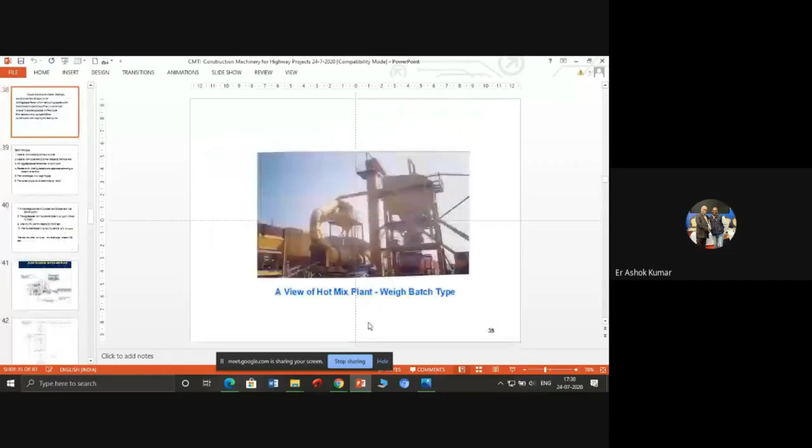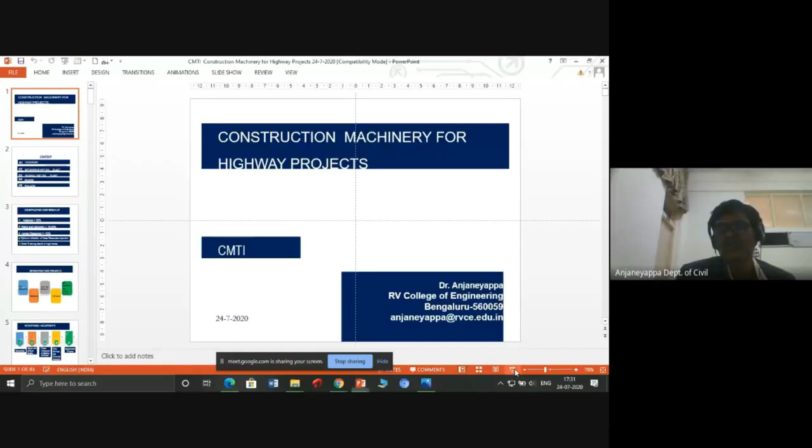The slide is in the last slide, is it there? I think it is here. Is it visible on screen? You can take a picture of it. Is this visible? Yes sir, yes it is visible, visible, visible.